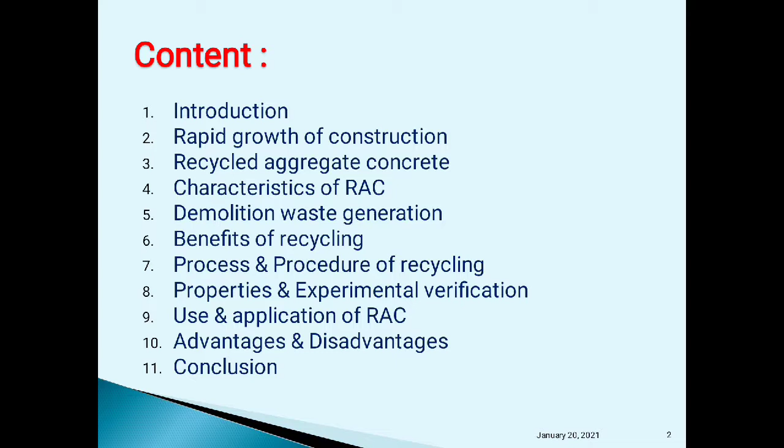Introduction, how it's rapidly growing in the construction industry, what is RAC, demolition and construction waste generated, benefits, advantages, disadvantages and conclusion.

Introduction. Before this, we are all familiar with concrete and recycling. Concrete is a composite material, a mixture of water, cement paste, aggregate and sand. And recycling is the process of converting waste material into new material.

The material is called recycled aggregate, which is produced by the concrete crusher. The aggregates are categorized by size as coarse and fine aggregates. The coarse aggregates are those which retain under 4.75 mm of sieves, and fine aggregates are those which pass through the 4.75 mm of sieves.

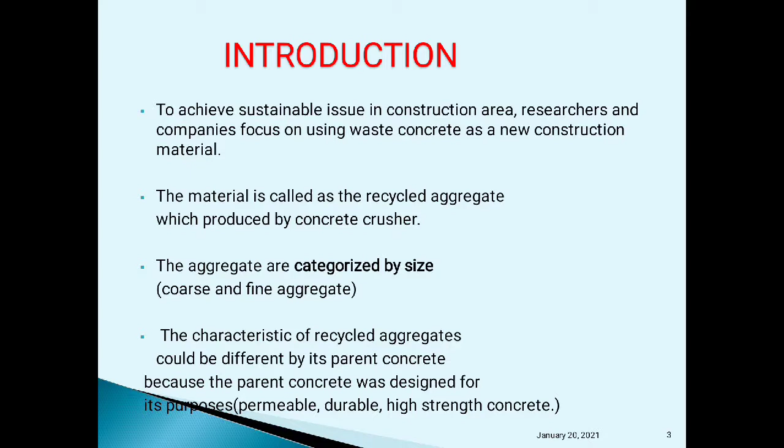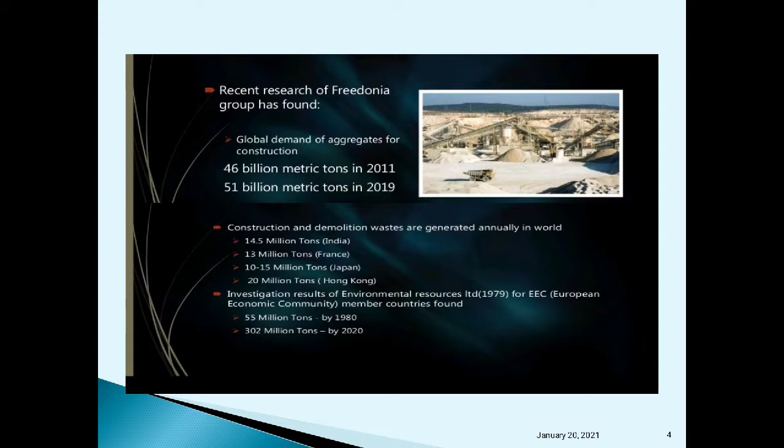These are the data from recent research by the Freedonia Group, which found the global demand of aggregates for construction is 51 billion metric tons in 2019, increasing day by day due to demand in the construction industries. Investigation results of Environmental Resources Limited 1979, of European Economic Community member countries, found 55 million tons by 1980 and 302 million tons by 2020. It shows how the construction industries are growing in the future.

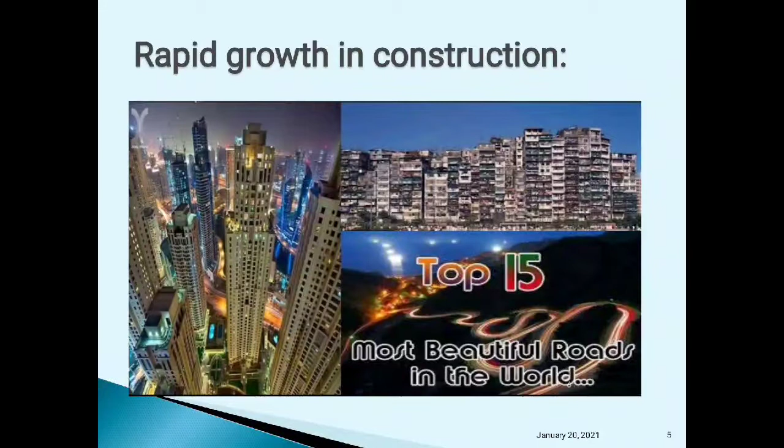Rapid growth in constructions. These pictures show how fast construction work is going on everywhere. We see beautiful roads, beautiful bridges and high-rise buildings shown in the figures, and we can see how the construction industry is growing so fast for the upcoming future generation.

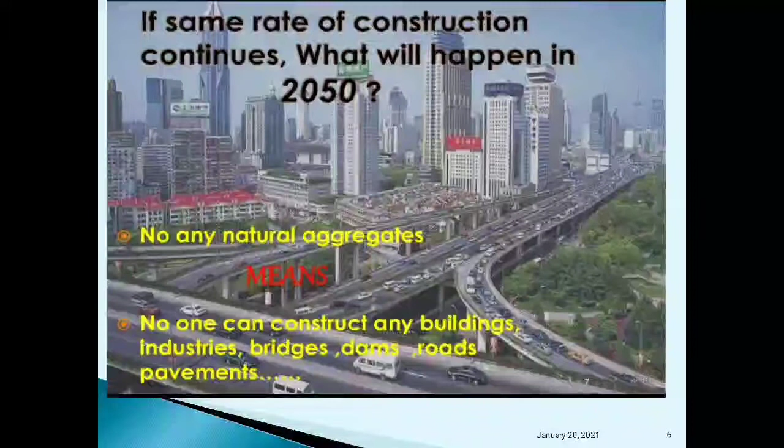And if the same rate of construction continues, then what will happen in 2050? Then there will be no natural aggregates remaining, and no construction work will be done. No construction work of building industries, bridges, dams, roads and pavements will take place, so there will be no jobs for civil engineers. Are natural aggregates enough for future construction?

No natural aggregates equals no construction, then no jobs for civil engineers, no natural aggregates left, because natural aggregates are a limited source and are decreasing day by day. It depends directly on the rate of construction. It means if there are no natural aggregates, then no construction will take place in the construction industry.

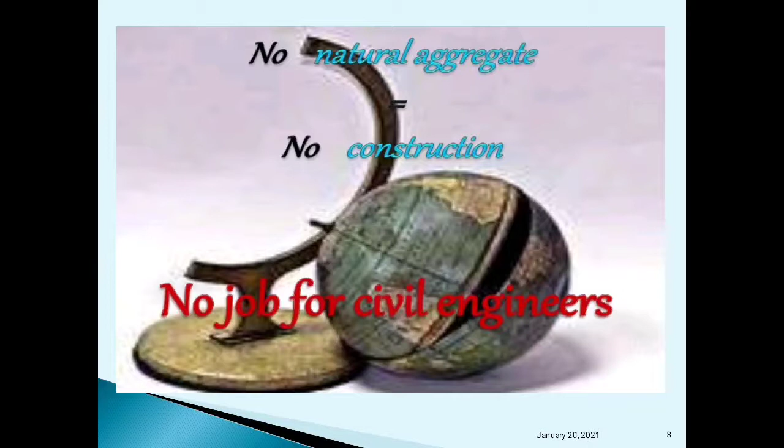Then scientists and researchers thought about introducing a new construction material, which is recycled aggregate concrete, in construction. The final product is collected from crushing and separating contamination obtained from construction and demolition waste resources such as concrete waste, broken bricks, gravel, bridge supports, roads, pavements, concrete road beds, etc.

What is recycled aggregate concrete? It has lower density, lower elastic modulus, lower strength and high water absorption capacity. Recycled aggregate has a proportional mortar attached to the aggregate, which gives higher porosity and lower strength to RAC compared to normal concrete. In addition, since recycled aggregate requires more water than natural aggregate, shrinkage could be a problematic issue in using RAC in practical use.

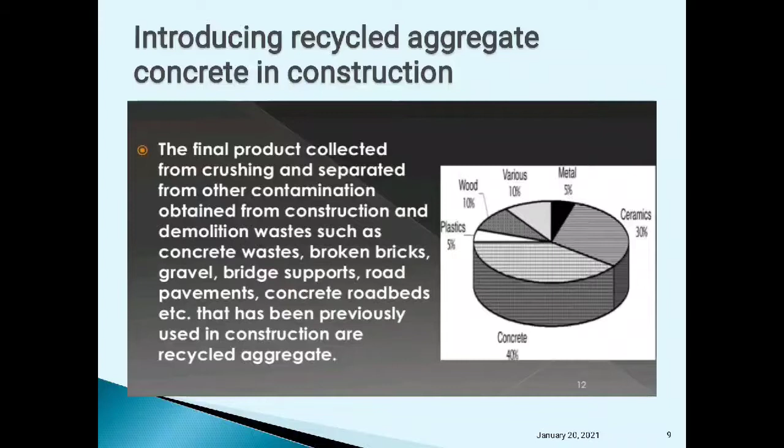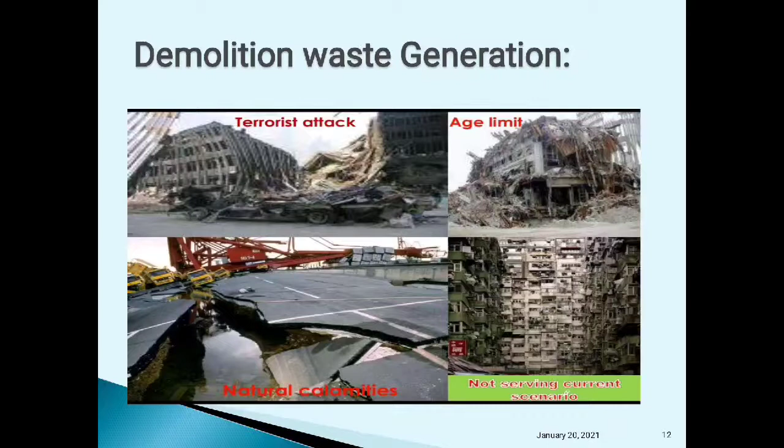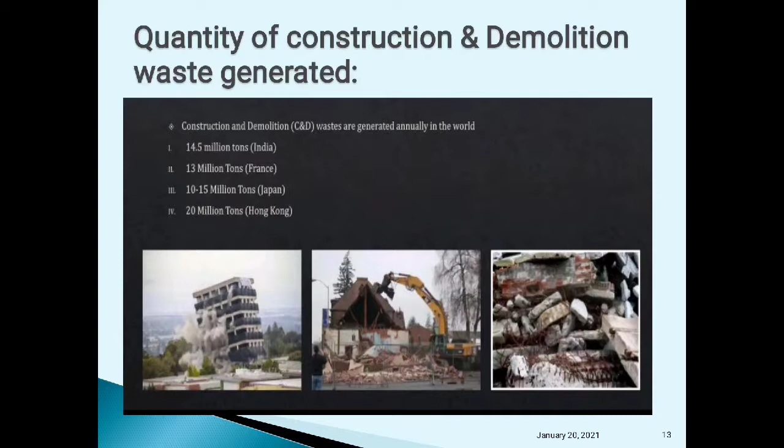Quantity of construction and demolition waste generated. This data shows how construction and demolition waste is generated in different countries. Construction and demolition waste generated annually worldwide are as follows: 14.5 million tons in India, 13 million tons in France, 10 to 15 million tons in Japan, and 20 million tons in Hong Kong, showing a high amount of construction and demolition waste generated in these countries.

Benefits of recycling concrete aggregate. These are the benefits.

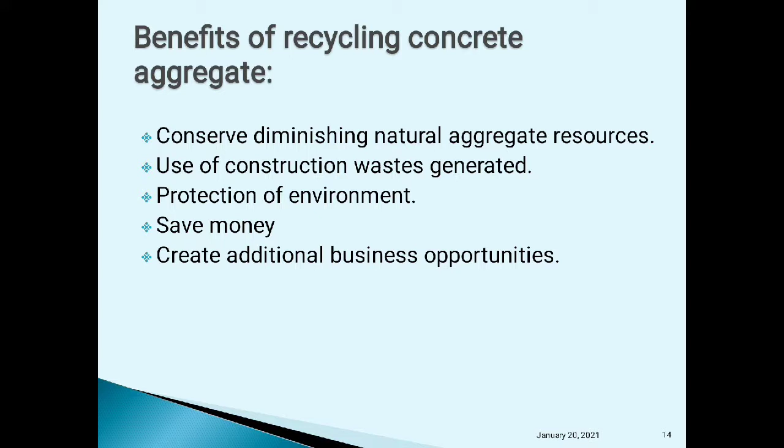Conserving diminishing natural aggregate resources, use of construction waste generated, protection of environment, saving money, and creating additional business opportunities - this is the process of recycled aggregate concrete.

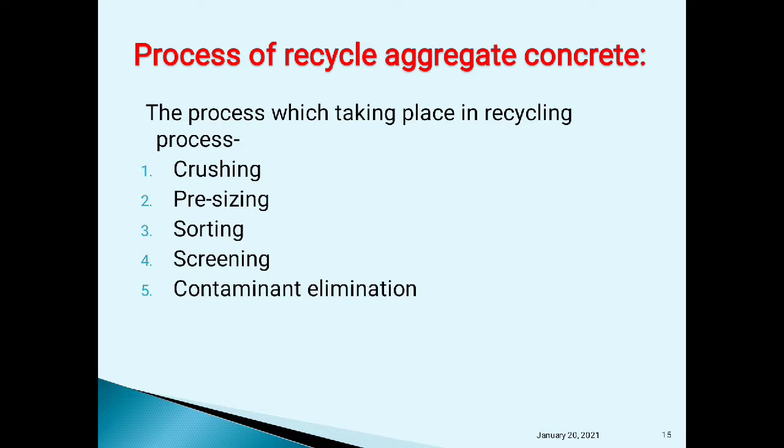The processes taking place in recycling are as follows: first crushing, then pre-sizing, sorting, screening and contaminant elimination. These are the procedures of how the recycling takes place.

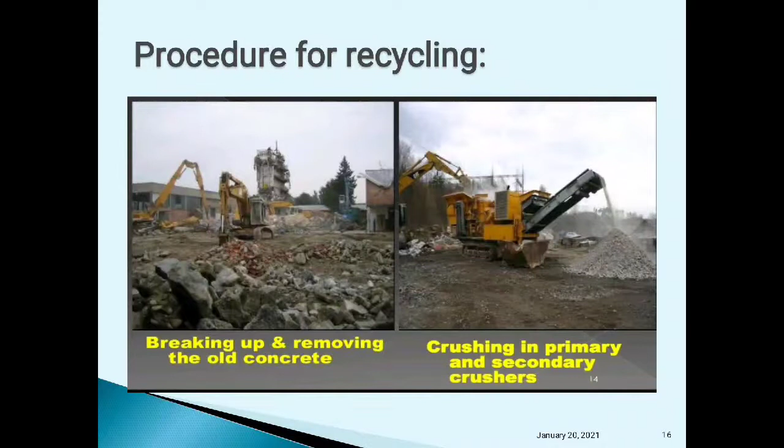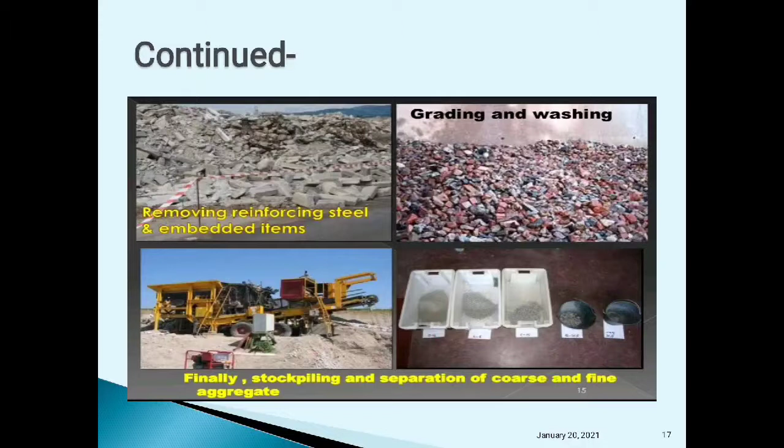First, breaking up and removing of the old concrete, then crushing in the primary and secondary crushers, removing of reinforcement steel and embedded items present in the concrete, grading and washing, finally stockpiling and separation of coarse and fine aggregate.

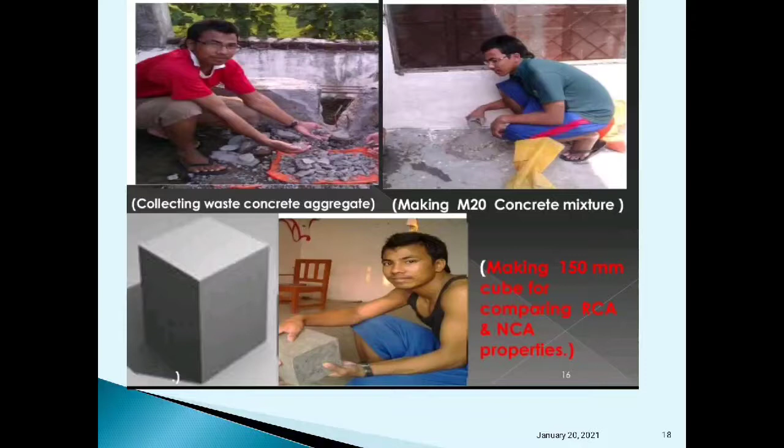After that we collect the waste aggregate concrete and make M20 concrete mixture, then take it into the laboratory for testing and its verification.

Properties and experimental verification: first, particle size distribution. Sieve analysis is done after crushing and sieving as per IS code 2386. It is done to separate out the coarse and fine aggregate. Recycled aggregate meets all the standard requirements of natural aggregates.

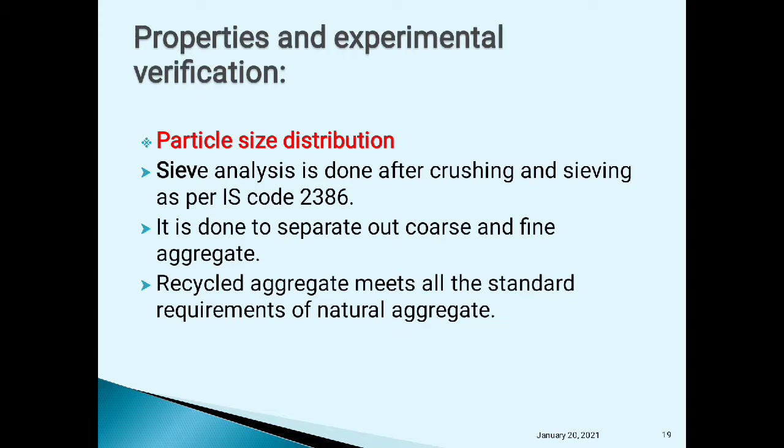Then specific gravity and water absorption. Specific gravity of recycled aggregate concrete ranges from 2.35 to 2.58, which is slightly lower than natural aggregate. Water absorption ranges between 3.05% to 7.40%, which is slightly higher than natural aggregates.

Then modulus of elasticity. RAC has lower modulus than NAC up to 15%, where RAC stands for recycled aggregate concrete and NAC stands for natural aggregate concrete. It can be increased if the hardened cement paste adhered to the aggregate is removed well.

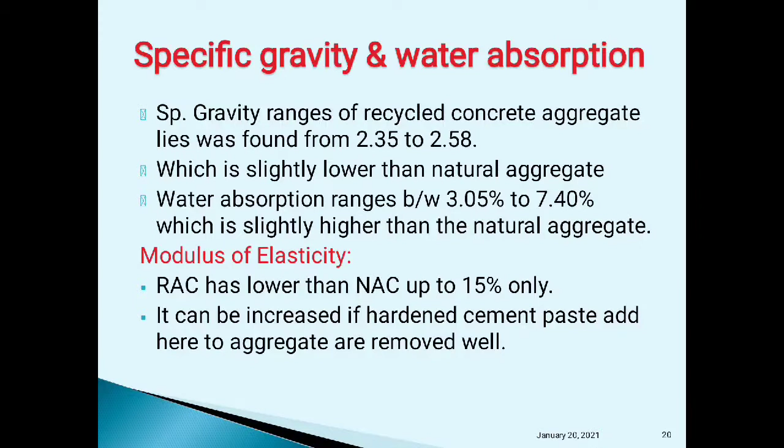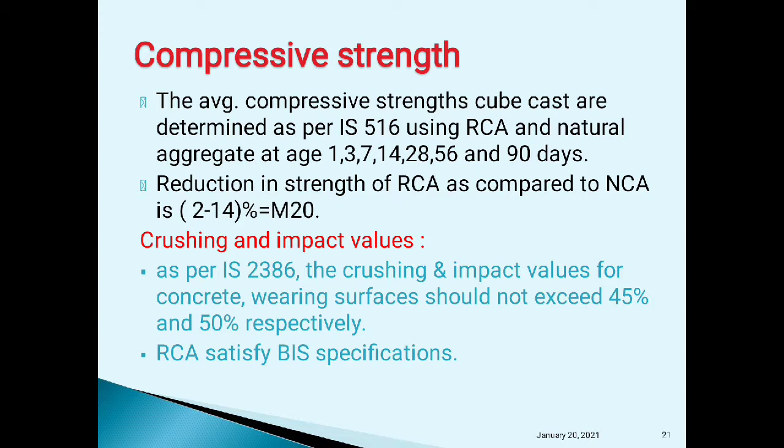Then compressive strength. The average value of compressive strength cube castings are determined as per IS 516 using RCA and natural aggregate at 7, 14, 28 and 90 day tests. Reduction in strength of RCA compared to NCA is 2 to 14% for M20 grade of concrete.

Then the use of recycled aggregate concrete in the construction industry. It is used in paved roads as aggregate base, aggregate subbase and shoulders, in gravel roads as surfacing, as a base for building foundations, and as fill for utility trenches.

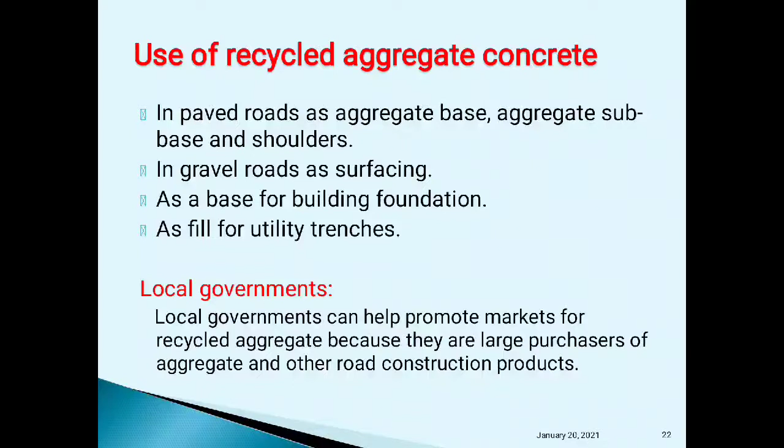Local governments can help promote the market for recycled aggregate because they are large purchasers of aggregate and other road construction products used in the construction industry.

Applications: in general application, without any processing, this includes many types of general bulk fills, bank protection, base or fill for drainage structures, road construction, noise barriers and embankments.

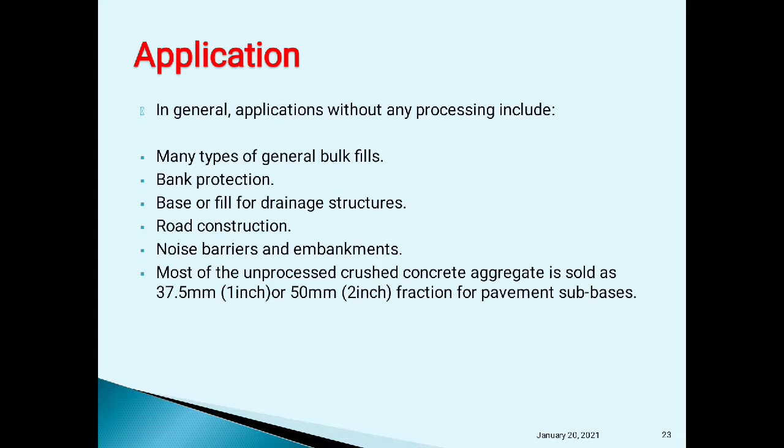After removal of contaminants through selective demolition screening, crushed concrete can be used as new concrete for pavement, shoulders, medians, barriers, sidewalks, etc., structural grade concrete, soil cement pavement bases, lean concrete bases, bituminous concrete, etc.

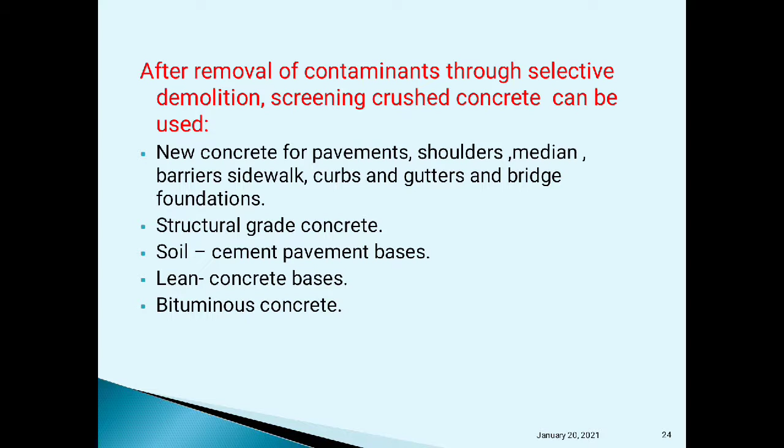Advantages of recycled aggregate concrete: first, it reduces the amount of virgin aggregates to be created and less excavation of natural resources will occur.

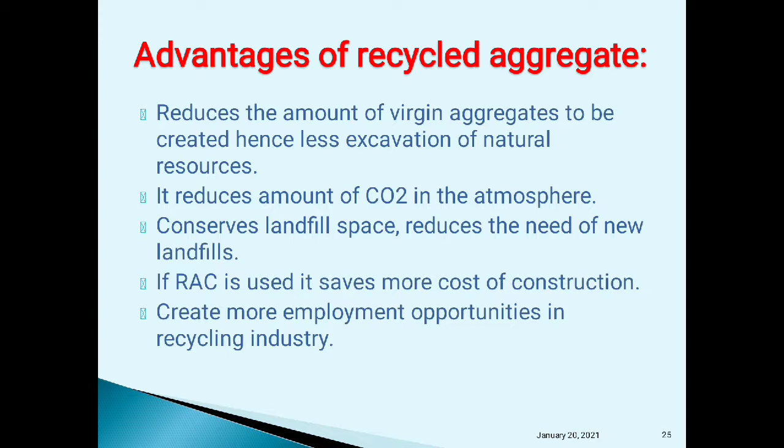It reduces the amount of CO2 in the atmosphere, conserves landfill space, reduces the need for new landfills. If RAC is used, it saves more costs of construction and creates more employment opportunity in the recycling industry.

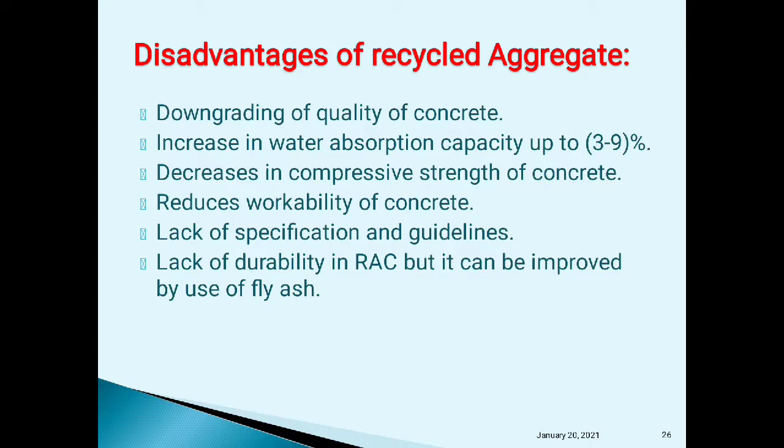Disadvantages of recycled aggregate concrete are as follows: downgrading of quality of concrete, increase in water absorption capacity up to 3 to 9%, decrease in compressive strength of concrete, reduced workability of concrete, lack of specification and guidelines, and lack of durability in RAC, but this can be improved by using fly ash.

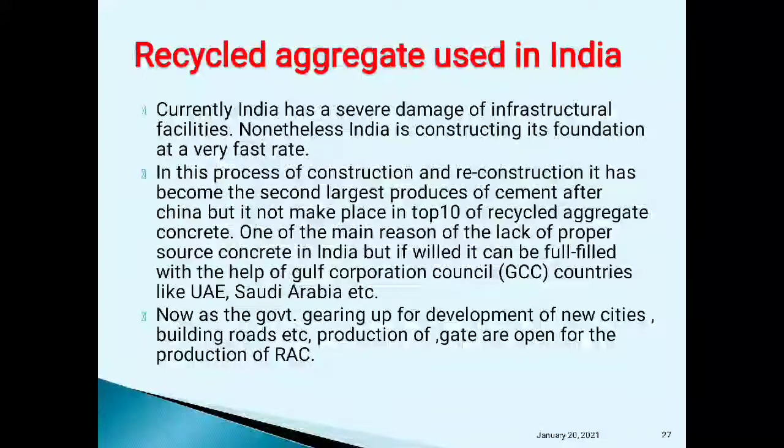One of the main reasons is the lack of proper source of concrete in India, but it can be fulfilled with the help of Gulf Cooperation Council (GCC) countries like UAE, Saudi Arabia, etc. Now, as the government gears up for development of new cities, building roads, etc., the gate is open for the production of RAC.

Recycle and reuse is an appropriate solution for the problem of dumping thousands of tons of demolition waste. The shortage of natural aggregates can be addressed by RAC.

More research and initiation in application of RCA is started to modify our design codes, specifications and procedures for use of RCA. Countries like UAE and Saudi Arabia, and India, have also taken some serious urgent measures for the scope of RAC, and if done so, concrete recycling will become one of the most important elements for construction sustainability in the industry.